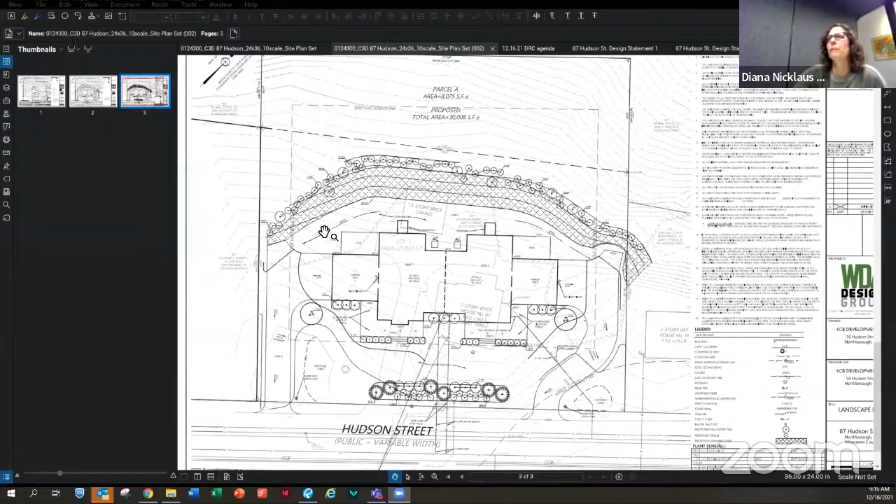If you have, Kathy, do you have any of the site plans available? You're muted. Okay, hopefully, are you seeing the site plan on the screen? We're seeing a photograph of the existing brick house. Oh, okay, I just went to the... Kathy, I can go to the site plan if you want. Okay, because it's up on my screen, but not sure why it's not up. Diana always comes to save the day. Right, somebody needs to quit unsharing then. I think Kathy. Oh, yep, that's me. Okay, give me a second. There we go. See it? Yep, now it is. Thanks, Diana. Diana, can you go back to number 1?

Yeah, okay, this is the existing site plan. So you see the brick house, which is obviously non-conforming, over the setback lines, and a detached single-story garage. As you look at the grades, the site slopes from Hudson Street to the rear going north, changing in elevation. It's about 258, 257 near the street, and we're proposing the floor elevation about 262.5. So we're proposing to remove these two structures.

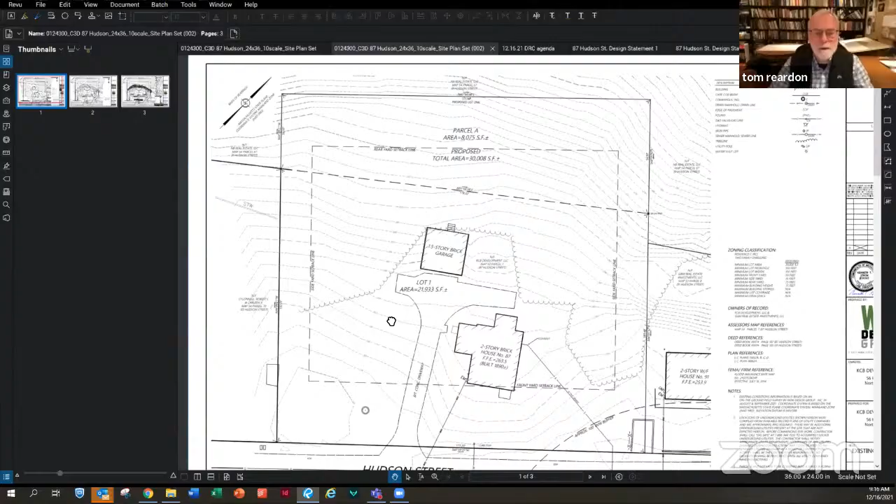Because of the grades, we took the opportunity to make a linear massing of the duplex so we don't go into the hillside that much and cause a lot of disturbance. If you go to number 2, you can see the footprint of the duplex falls pretty much left to right in about the same location from the street as the house. The existing garage is obviously further behind. So this allows us to stretch out the building left to right rather than going deep into the site. Also, because of the width of the frontage, we're able to put the garage entrances on the sides, so the garage doors aren't facing the street. The linear massing and narrowness of the building components keeps the building height down, and we don't have to look at garage doors.

So if we could go to number 3 - I know you haven't seen this yet - but at the back of the site, you can see we're going to do some grading to create some outdoor space and some planting on the height on the back side. We have some planting proposed, which Dave hasn't had a chance to look at in detail, but that's the general layout.

This is Randy Waterman from WDA, we're the design engineers and landscape architects. Just to follow up on what Tom said, the setback in this zone is 30 feet for the front yard. The existing house leans over that slightly in the front corner.

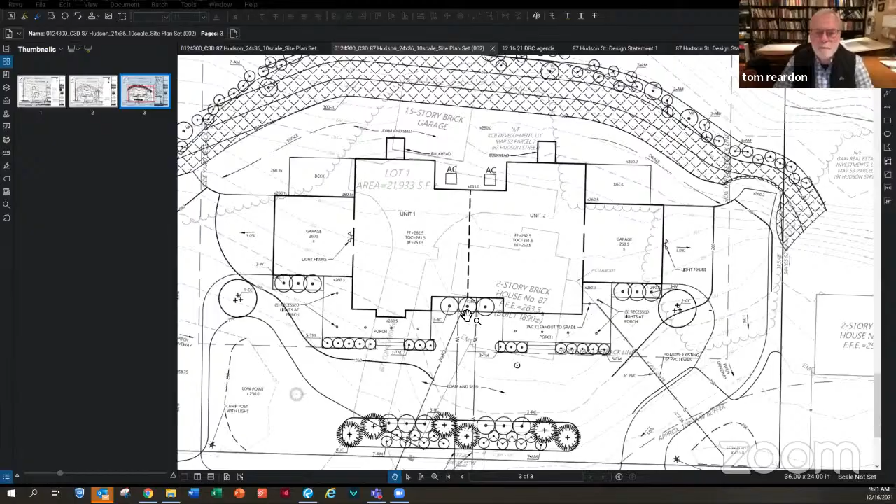I should just mention, the house is connected to town sewer and water, so there's no septic issues here or anything. We've already talked to Scott over the DPW. We're going to be adding new water connections, one for each unit, and then the sewer where it comes onto the site—we'd be replacing that with a new 6-inch PVC pipe to connect to the building. So all the utilities would be underground.

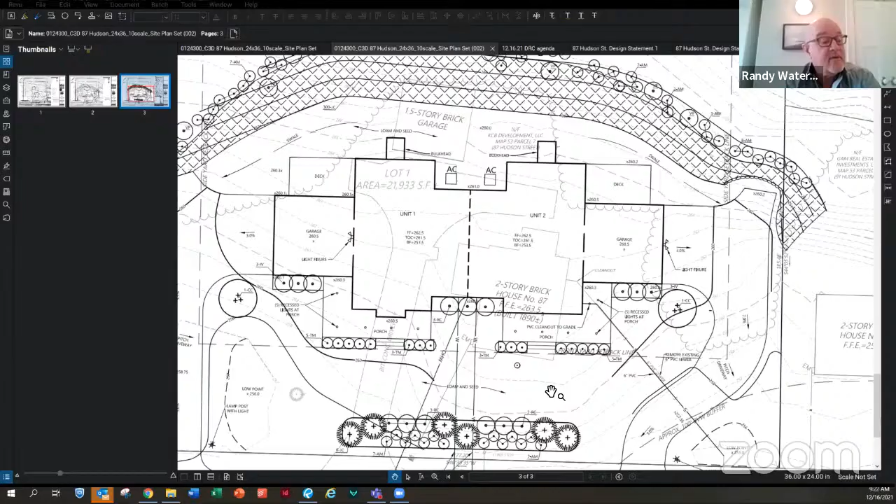Anyone have any questions regarding the site layout or site plan?

Kathy, did staff have a chance to look at it? No, I've reviewed it as far as when the materials came in, but for design review we don't typically prepare a memo regarding the site plan—that usually goes to whether it's the zoning board or the planning board. But in general, my overall comment is that the applicant is working with the site, and those garages—that was one of the things I noted personally—the garage doors are hidden from the street, but they're on the sides. You're going to be looking at a lovely house, a lovely residential structure, in my opinion.

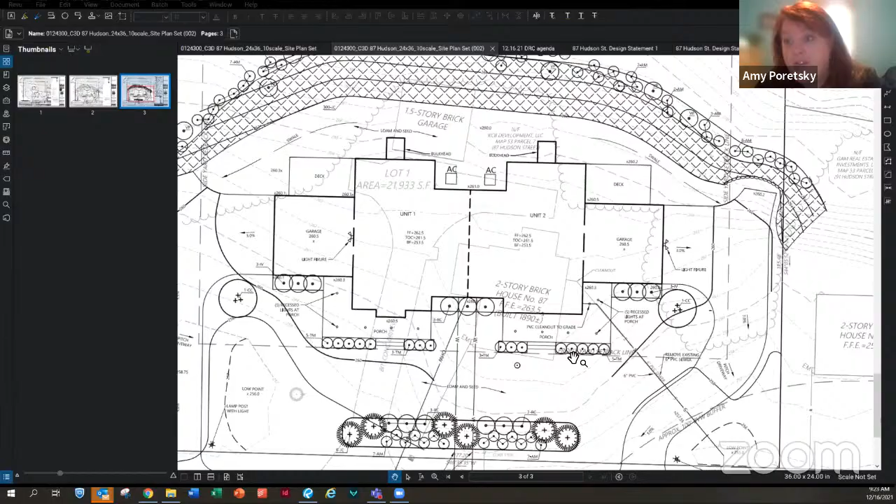Does anybody else on the board have questions, Amy, concerns?

Can you hear me, Amy? Yes, Lisa? I just have a couple of questions on the hill behind—is that the slope? That's just going to be ground cover. There's not going to be a wall, a retaining wall or anything for that, is that correct? That's correct.

Behind the slope that we're showing are existing deciduous trees, and we're planting the upper edge of that, and then the slope where we have the grading, that's all going to be ground cover, no walls or anything. So basically you could walk up there and stay on the top area and have a picnic or something—there's enough land to do that, right? I haven't been out there, so.

And the two larger trees that look like they're by the garages—those new plantings? Yes, those are proposed. And what are they? Those are red bud, called out to be 6 to 8 foot high.

And for the front grouping with rhododendrons, aren't those a little tough with salt coming in off the road? It looks pretty close to the road. I love landscaping out there, but aren't rhododendrons kind of delicate? Well, those are on the back side of the island. The shrubs in the front of the island are 14 chokeberry called out on the front side.

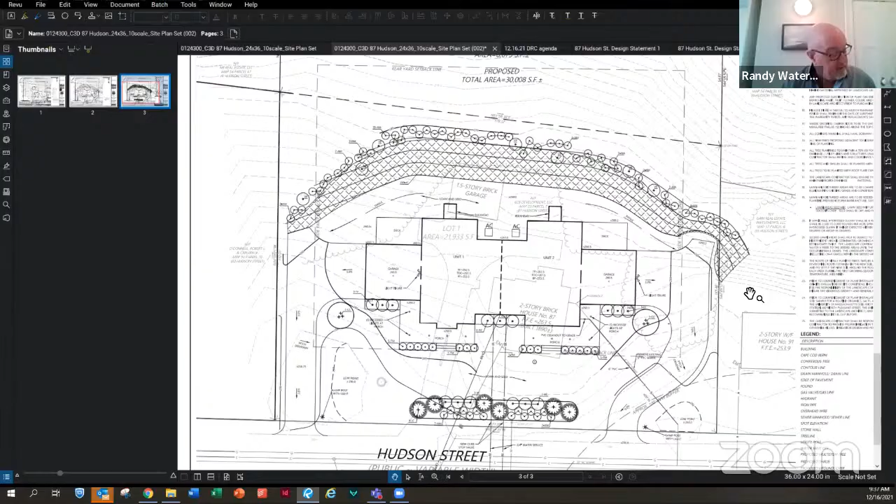Yeah, we pulled the island back off, so the island's almost 10 feet. The beginning of it is almost 10 feet off of the street, but we didn't push it all the way out to the lot line. We tried to keep it back a little bit for that exact purpose.

Perfect, that's great. And most of the stuff in there is not really tall. But no, I'm just throwing it out there, and if it's that far back, then that's perfect as far as I'm concerned.

I'm not sure, and I'm brand new at this. This is actually my first DRC, so if I'm saying really stupid things, I apologize. No, not at all, not at all.

They're all good comments. The only other question I have is in most towns, and I don't know the standard here, I didn't look it up because it's the first I saw the site plan, typically the paving is 5 feet from the property line. Do we have that here or not?

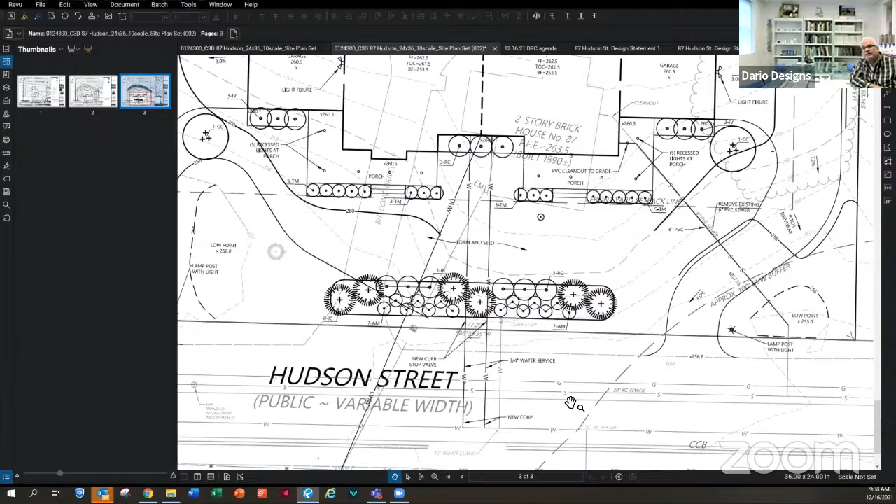The pavement is 4 feet off the lot line in this particular site. I don't know what our guidelines or regs are for paving. Is it most towns it's 5? That's why I'm bringing it up. No, I don't think they have any minimum setback from a driveway to a lot line. Okay, most likely, perfect, that's the only question I have.

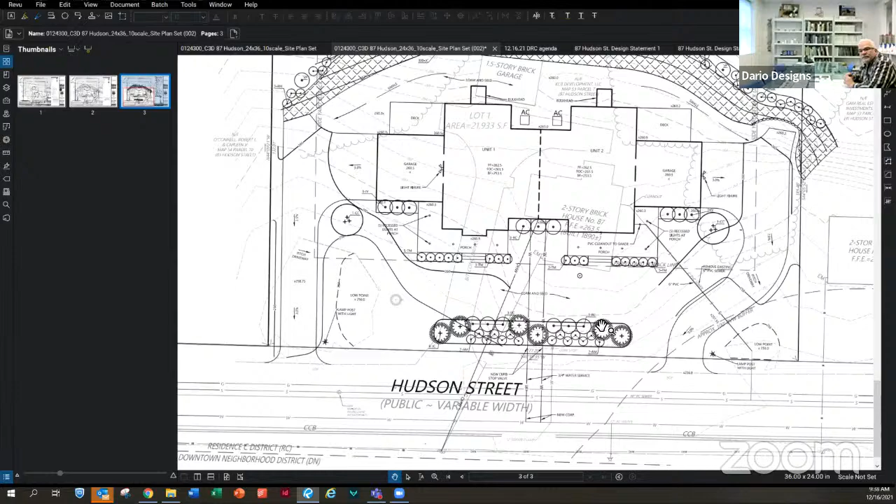I agree, at least years ago when I was part of an addition, the driveway could go right up to the property line, driveways and fences. I don't know, Kathy, if you know if that has changed or if that's what you know it to be in Northborough. No, there hasn't been a change on that.

Dave, do you have any more questions about the site plan? Nope, I said my piece. I think it's textbook fantastic. The ability to turn those garages was dynamite. It blends itself perfectly with the land. This is textbook, 10 out of 10.

The issue with the driveway coming in, I think they did the best they could with the swale right there. If the owner who owns both of these properties on the right feels he needs to put some shrubs, given the 4 feet isn't enough room to do anything on the side we're talking about with the duplex, if he wants to put some on his own side, he can do that. It's going to be up to him. Otherwise, I think this is fantastic. It's dynamite.

For me, the only question I had is when I went on the GIS map, the lot is 20,000 square feet, not 30. Has there been another piece purchased? I know it's owned by the same person, but I think there'll have to be a new A&R done up. Has there been? The A&R is not done.

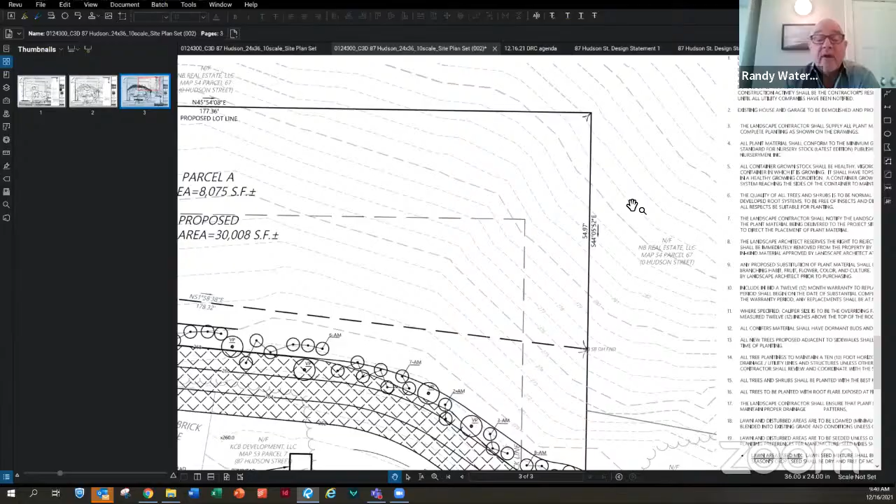As we show on this plan, you can see the dash line that crosses behind the slope, and the existing lot is just about half an acre. That dash line is the back of the existing property. Our client owns the 13-acre parcel behind this, and we've shown on here with the new dimensions the land area that would be added to this lot to make it just over 30,000 square feet. There's a note on the plan that says we'll have to do that as an A&R plan with the planning board, and that would be one of the next steps, one of the remaining permits.

That was really the only site plan question that I had that hadn't been covered yet. So if everybody's okay, we can move on to the house design.

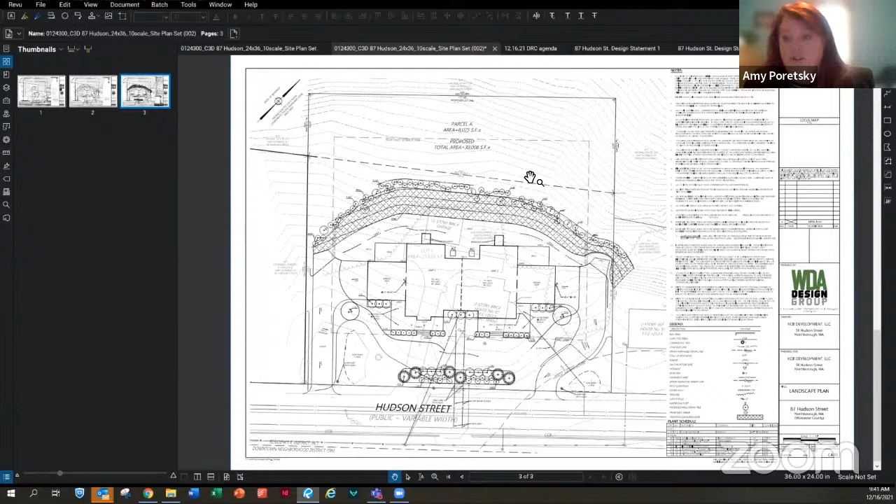So the top elevation is the front facing Hudson Street. As I said in my design statement, I'm working with what is known as the I House with this temple front. It's more popularly known as the American Farmhouse. I drove around Northborough on the main older neighborhoods, and there are dozens of these temple front houses appearing between 1806 all the way up to 1910.

The basic massing is very similar, even though there are different stylistic changes as you go through different historic and architectural styles. If you look at the gable, the two-story gable where the front door is, I've used a module of about 22 feet wide for that gable. Also, the garage is 22 feet. The main house components are 44 by 22, so there's a 1-to-2 proportion in both plan and elevation.

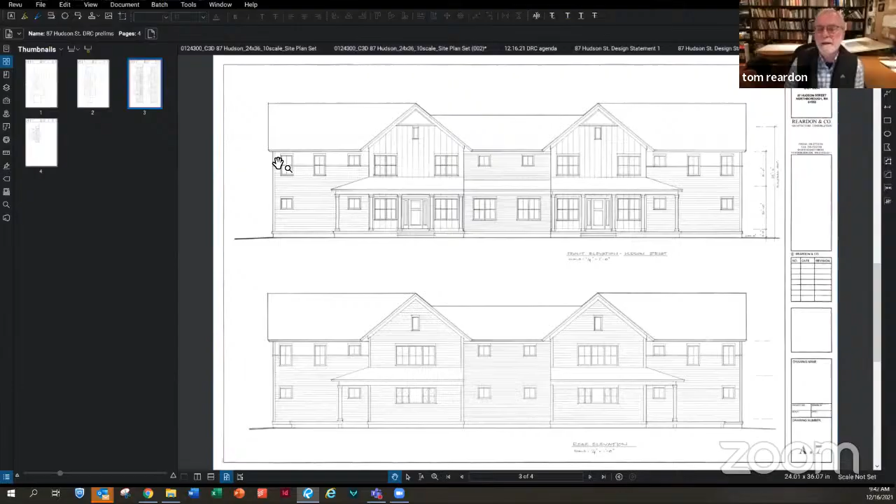This is very similar to what you see in many I houses, where they have a proportioning system of 1-to-2 or 3-to-5, which is the golden section. I've also used that proportioning in the double hung windows, so they're 2.5 feet wide by 5 feet tall, that's a 1-to-2 proportion. The muntins are also a 1-to-2 proportion. The columns are at like a 9-to-1 ratio; take the diameter of the column times 9, that gives you the height. That's a proportioning system that's very common in classical tradition, the vernacular.

In terms of the siding, we're using clapboards and some board and batten. So those are some of the elements from the traditional vocabulary of the I House.

What makes it more of a contemporary use of that same vocabulary is that we've doubled windows in some areas, which is not characteristic of traditional design. We have attached garages, which traditional I Houses would not have because they predated the automobile. They probably didn't use patterning of the siding like this, which is more of a contemporary use of the materials available. They would have probably had a uniform siding throughout.

But the siding would be probably a cement board or a composite. For the roof material, we are thinking of possibly using a standing seam metal roof on the front porches, and then possibly a regular 30-year, 40-year architectural shingle on the main roofs. That's kind of open for discussion.

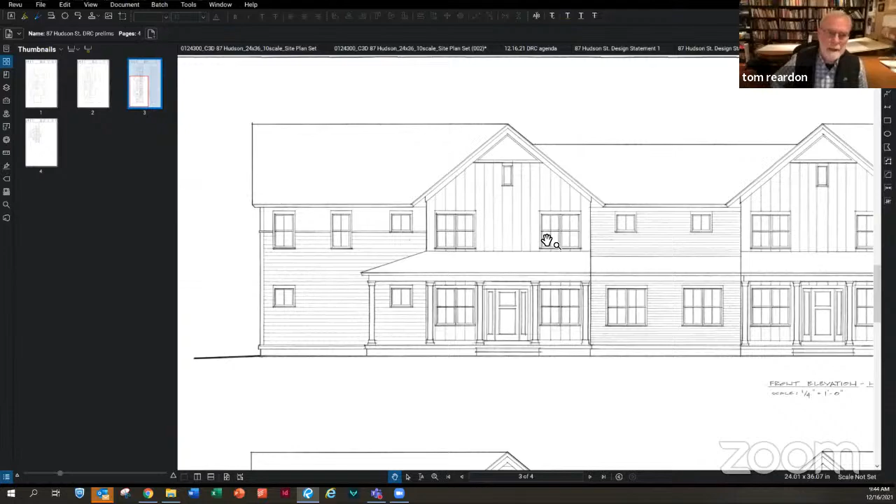I did a couple of renderings and a model. I don't know, do you have those available? I'm not sure I've opened those. Let me see, I haven't seen them. Okay, well, here's the model.

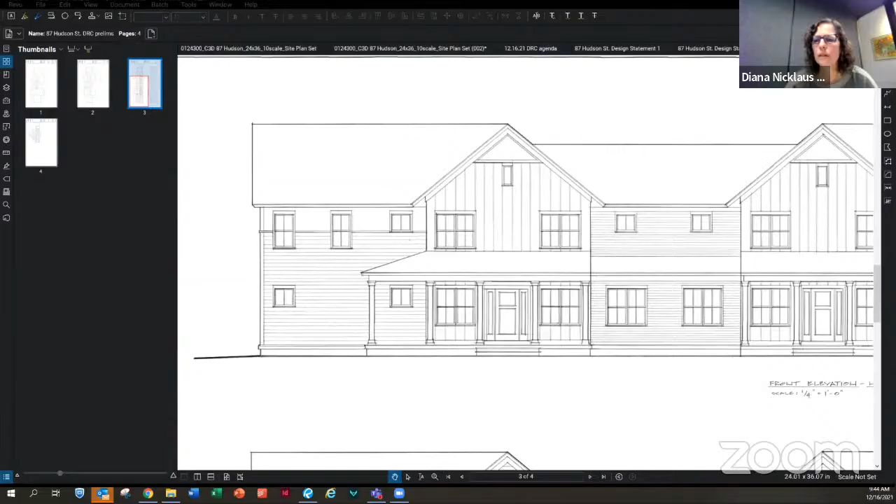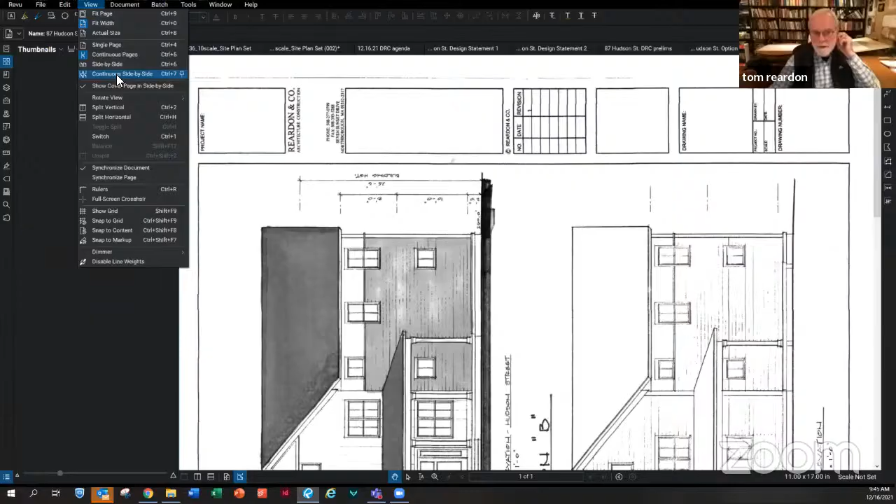So what we're proposing is we're not committing to a specific coloration, but we did a couple of possible views. Here's one with, say, a dark gray siding with a white accent in the middle at the tall gables with a darker roof. Do you also have the option A?

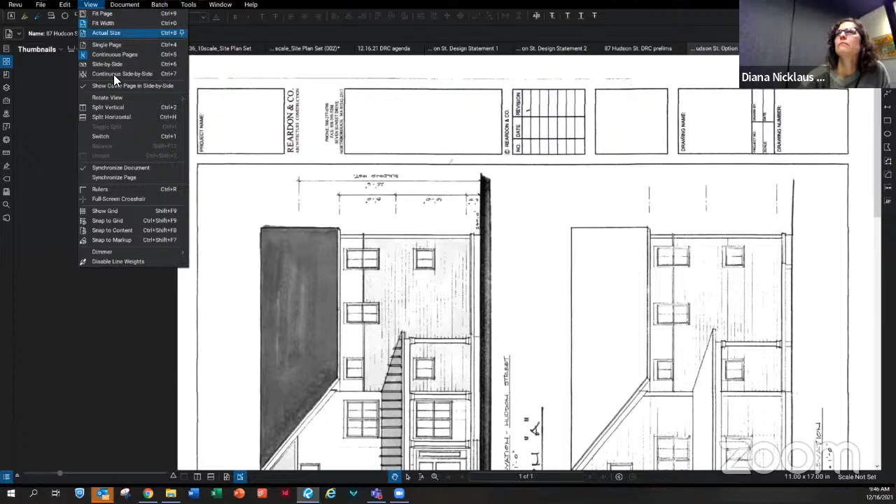Okay, here's another option where we might use like a standing seam metal on the porches and then regular asphalt shingles on the other. So we are just saying that the type of coloration is not determined yet, but these are the directions we're leaning at this time - grays, whites, and dark gray or black. Any questions on this?

I'll ask just a couple. It's hard to see, there's no shadows on the rendering, so it's hard to see the depth, but the model you had would probably answer a lot of the questions just to physically see, because a lot of the I-houses will have rakes and returns and a little more detail on the eaves and gables, where it looks like they are popping out a little bit more to give it some three-dimensionality, or just a little more character, which it looks like it's doing.

And the only question I have, it's funny, I-houses are from where I was born and raised, a lot of them out in the Midwest is where they were really prevalent at one point in time, are the smaller windows, which I don't see on any elevations of the historic, the half windows. I think the proportions of the normal windows are great, but the half windows are a little sparse, for a better choice of words. Maybe, I don't know if they're bathrooms or whatever, you're trying to not hit stuff on the inside, but certainly the garage window might be able to at least come down. I don't know, they just look a little poke out.

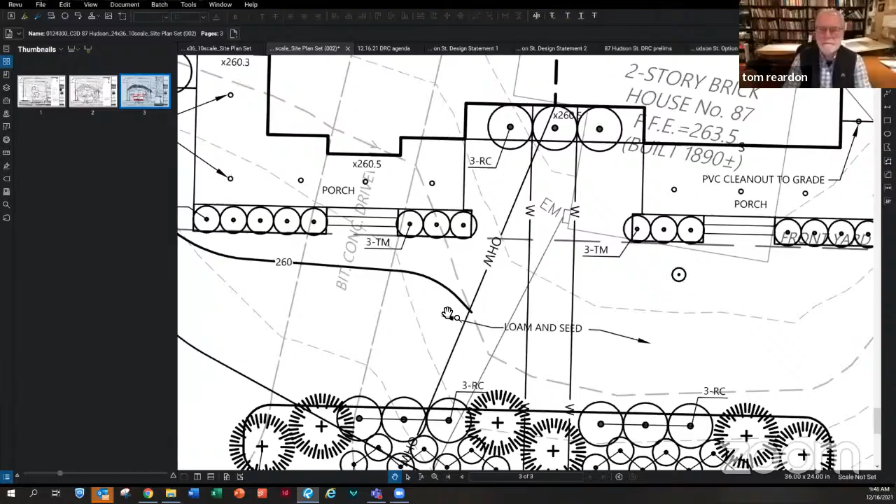We would probably be adding some sidewalks that loop over towards the garage. Yeah, that would make sense, just so you have access to it without slipping in the mud.

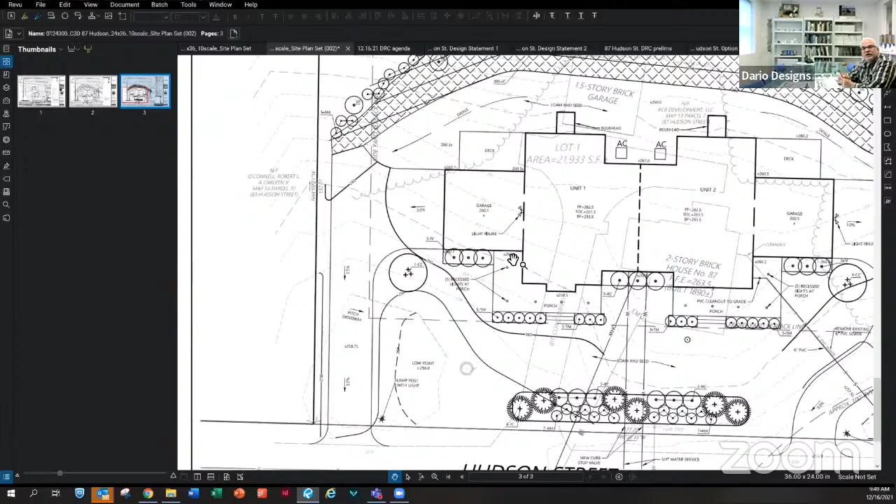Sorry to go backwards, but I was looking at that, and I think going to the drive or the garage would be best, because then you keep it available to the public, but you're not bringing that much more concrete or asphalt out to the street. But just to be able to get out, whether it's bluestones or whatever you want, just to have something to land on after the steps.

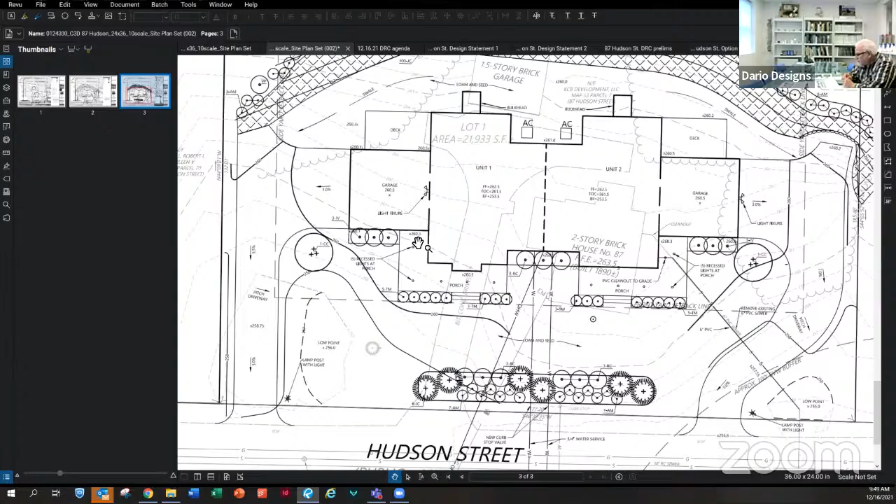Yeah, you can see the depth here more, the three-dimensionality on the site plan. And then the question I have is, on the building on the left, there's a pop out, and the building on the right, there isn't. Is there something going on there that's different? You mean at the front entry? Yes. It was just showing the client an option if they wanted to create something of an airlock at the front door or not.

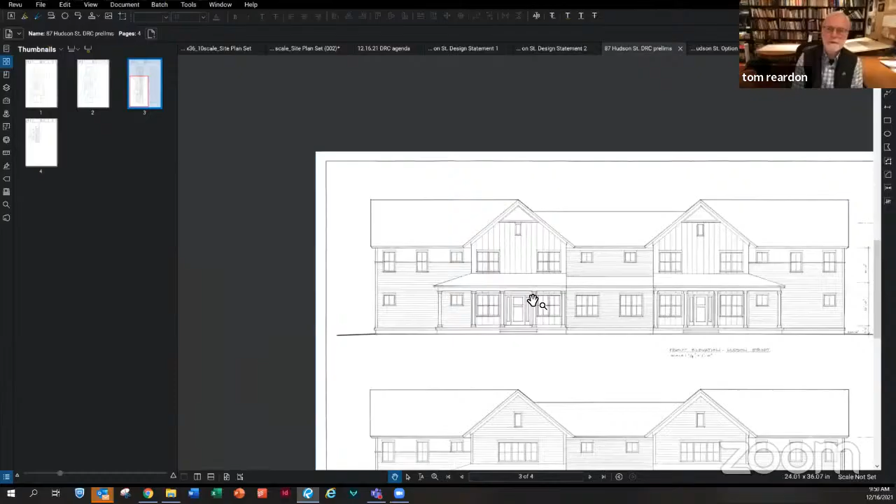Same with the second floor plan, if we can reduce the 4 bedrooms to 3 bedrooms. We're just trying to build in some flexibility and see what the response is in terms of marketing.

Makes sense. I made the front porch deep enough to accommodate that, because not that you would come and go very often from your own front door, but guests would obviously come through there, and you might want to prevent the winter airs from blowing through the main living space.

I see positives, and it looks a little plain in some of the designs, but the porch, the garage is on the side. An 8-foot porch, the 2 feet is huge, and not that it matters, but when our house was built here on North Road, the first thing I did was extend the porch. You can actually put a chair there and sit down, and people can walk around, and you can use it, as opposed to a cosmetic glue-on, if you will.

The real porch is a big deal, and it speaks to a lot of what we're looking at with the master plan implementation, everything else, trying to get a little more of a front porch society. So hats off to you for that. Thank you.

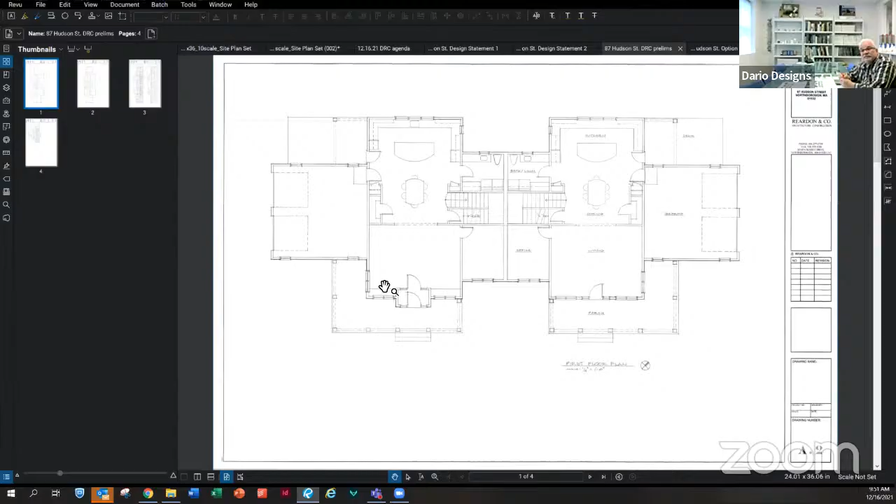So regarding the windows, Dario, there are some diagonal sight lines on the elevations that determine the bottoms of the windows coming off the roof and so forth. And you're right, the smaller windows are in garages, bathrooms and closets. So that's one area where we are diverting from the traditional I-house vocabulary, by mixing in a smaller sash window that designates a different use on the inside. The larger windows are the larger habitable rooms, and the small windows indicate service rooms like closets and bathrooms. So it's not an attempt to recreate a historic style, but to work within the tradition.

Yeah, it's just, there's something, say the four windows in the middle, they just look sparse, and maybe to your point, you do a little bit with the siding or something so it doesn't look like a 1960s subsidized housing thing. It's just a little bit sparse. On the top one, it's great because on the bottom you've got the big windows on the front, and I guess the rear doesn't matter as much, the little guys in the back. But anyway, you've got a lot more going on in the front, which I think works. Maybe the two end garage windows are the only ones that make sense to extend, and maybe they don't. That's really your call.

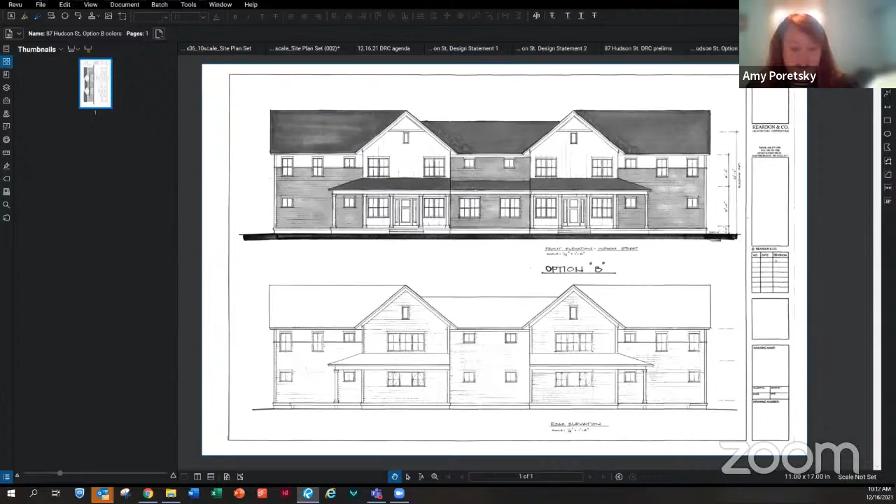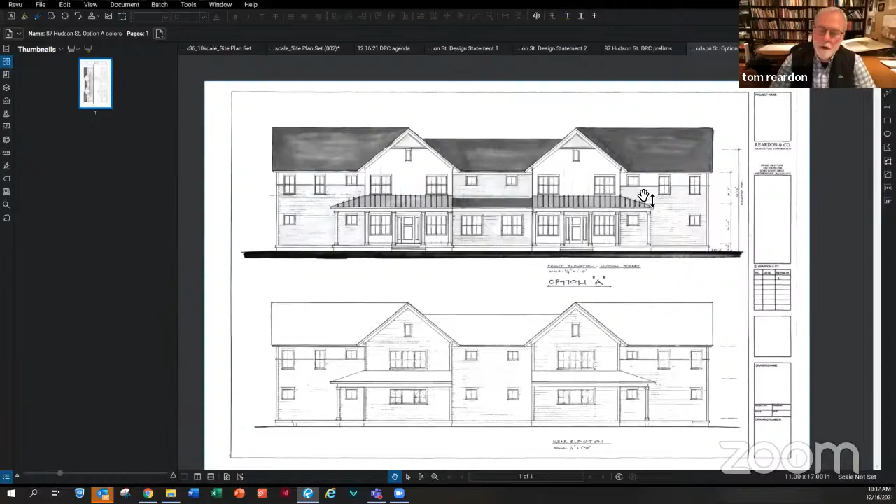Just one quick question, Tom - is the only difference the metal roof? What is the difference between option A and option B? Well, there's a different color of gray on the siding. So it's color - a lighter gray on the lower body, and then the standing seam roof. He may decide to put the standing seam roof on all the roofs. I mean, that's what we have discussed.

Dario's point is let the client decide, and we will run that by you with paint chips and some selections. But if you're comfortable with this vocabulary, we'll take it from there. Okay, I was just curious for the untrained eye what the difference was. It's mostly color and the roof - pretty much metal, or not metal. Right, okay.

Those are all my only questions. Does anybody else have any questions? Okay, since this was the first time seeing the site plan, I don't think there will be any more questions, but if people want time to review it, I don't know how we want to go forward with this, Kathy - do we want one more meeting, or is everybody fine the way it is?

Usually it goes through three meetings, but it seems like we've covered most of it. But since we only got some of the designs right before the meeting, maybe we should meet one last time just to make sure nobody else has any questions.

So typically, when we've met two or three times, it's because there's something unresolved. And I don't think we have anything unresolved, because we've agreed - or some of us have agreed in principle - that the color scheme will be fine. So I'm not sure, if they come back with the same materials, are we going to go through all of these drawings again as a group? I definitely wouldn't. My main point was we got the site plan within minutes of the meeting.

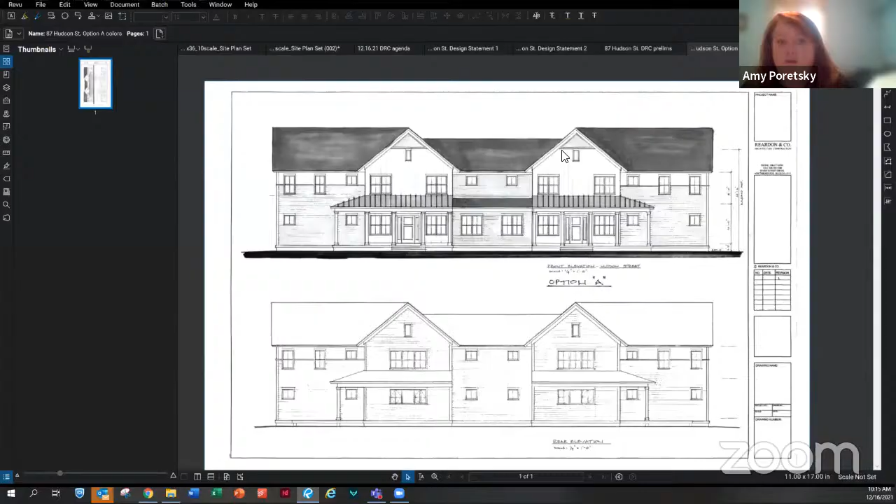I know the site plan will come up again in front of the planning board. So if there are any site questions, Fred will review the plan, and as this is advisory, changes could be made at the planning board side.

I'm fine, but I don't know that everything is resolved in Diana's mind. I'm not convinced that the lights hitting the neighbors, the sidewalks not being drawn, or the long windows have been resolved. But that's just one person's opinion.

If there's something minor like those, we've also in the past said, hey, draw it in, shoot it across in a quick email and we're done, instead of trying to make a big meeting and getting everybody together, because those are very minor things. That's something that can be done very rapidly, and just with an email, hey, great, there's nothing major outstanding here. I'm cool with that.

We do a lot of contingent approvals. I don't think with open meeting law it's... we can do that documented.

Well, you can in the sense that you document in the meeting minutes: this is approved following confirmation that A, B, and C has been done, and that can be done via email. You can do that under public meeting law. I go to design reviews quite frequently, and that is an acceptable means of approval, as long as the minutes clearly cover what we are expecting.